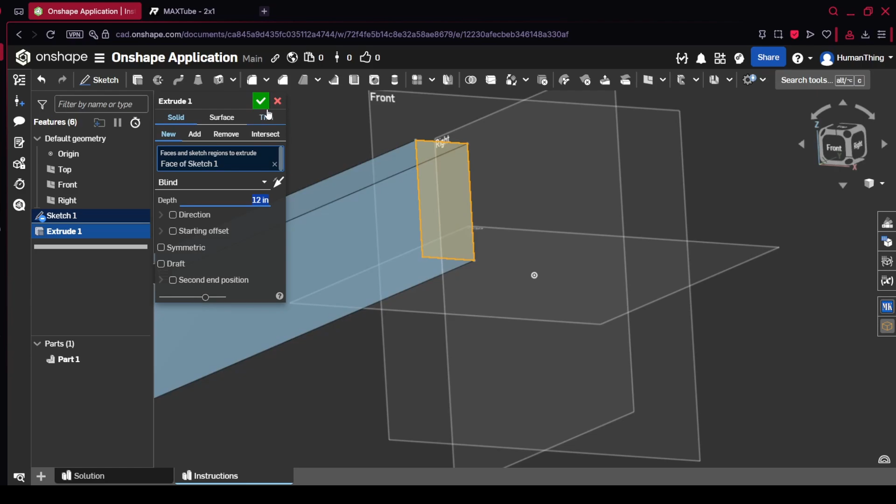So first thing you need to do is you need to of course make a sketch, and the size of a MAXTube is 1 by 2. So you need a 1 by 2 inch rectangle to start. Then you need to extrude that out 12 inches. So you should start with something like this, real simple.

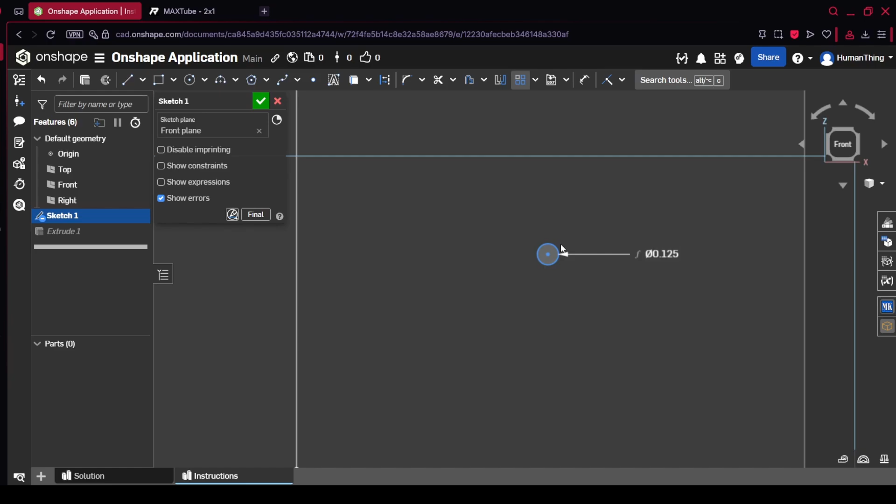Then we're going to go back into our original sketch. This is just for me showing you. You won't actually do this, but you're going to make a circle that is 1/8 of an inch in size. Simple as this. That's going to be the holes that you saw on the MAXTube. And then you're going to use a linear pattern to replicate this. You need to make sure that the holes are spaced 1/2 inch apart. And then you need to replicate it however many times is required for that side.

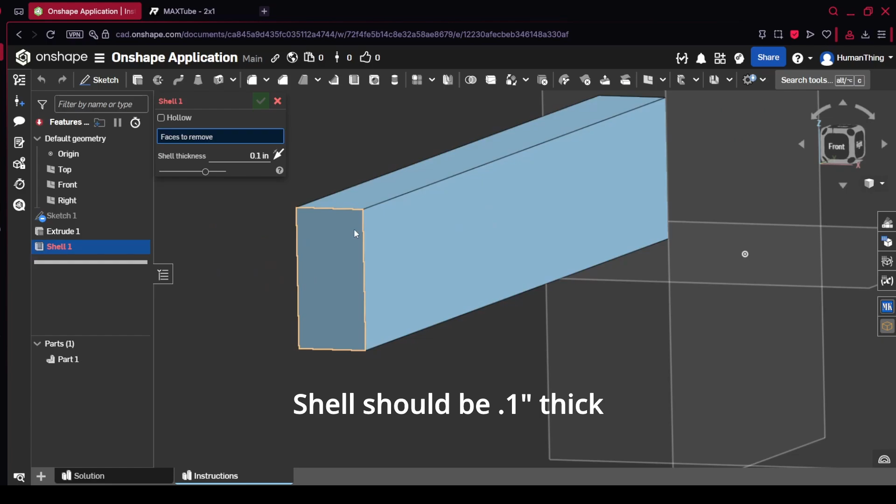And then of course once you finish, you just need to click the check to confirm that's what you want to do, put the holes in it. And then also, the last thing you gotta do is you gotta shell this out. And so shelling it, you're just gonna use the shell tool and shell out this side and the opposite side. So that's your instructions. That's what you're gonna be doing. And so now I'm going to give you some time to try that before I show you the solution. I'll give you about 30 seconds.

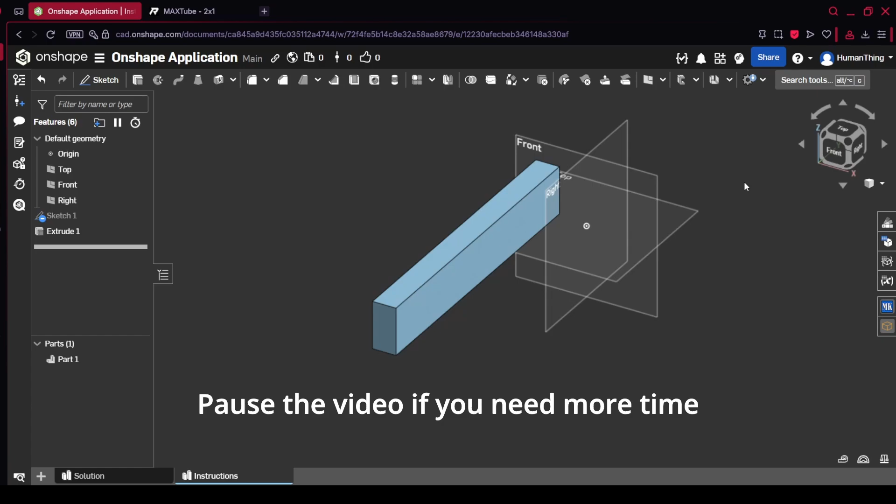Okay, it's been about 30 seconds. If you're not finished, pause the video, come back when you're done. But so now what I'm going to do is I'm going to go over to my solution and I'm going to show you guys how to make this. So of course you first make your sketch, make your 1 by 2 rectangle, real simple. We're going to hit the check there, we're going to extrude this out 12 inches.

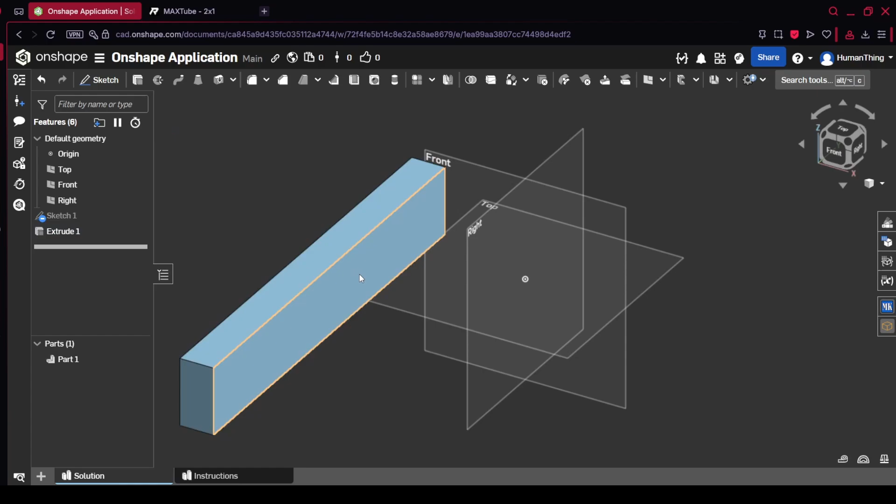And now what we're going to do is we're going to make a new sketch on this face. And very simply, we're going to make our 1/8 inch circle. We're going to use dimension on the center point of it to get it to be a 1/2 inch from this side and a 1/2 inch from this side because that's how far away it needs to be. And then we're going to use linear pattern on this. We're going to tell it to replicate 3 times this way, spaced 1/2 inch apart.

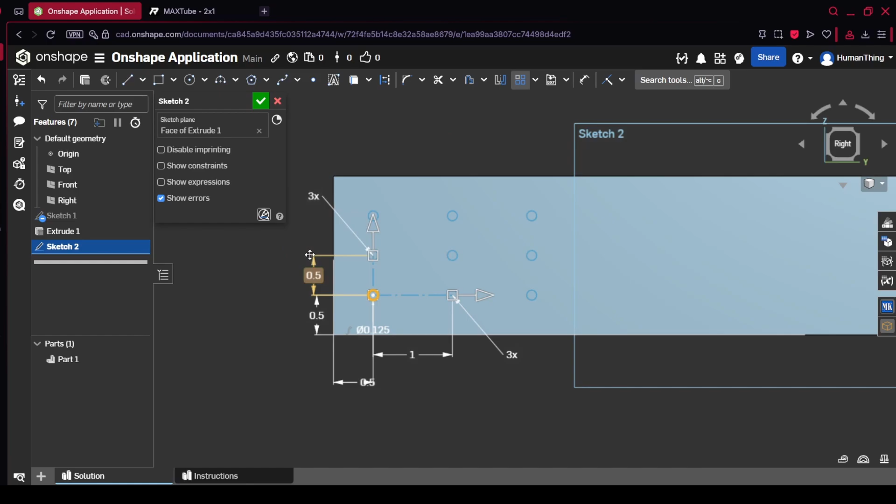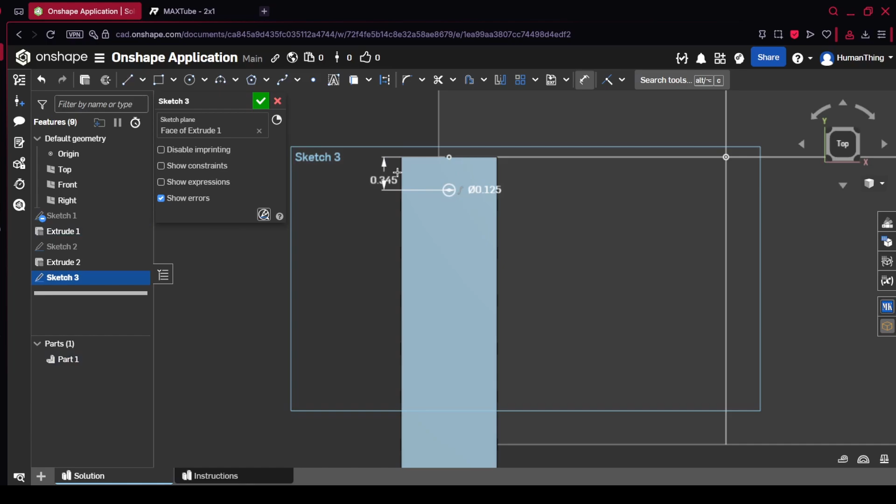We're going to tell it this way, it's going to be 1/2 inch apart, and it's going to do it 23 times. And so if we confirm that, hit check, click on this, extrude, and we're going to tell it to remove at a depth of 1. That is now that part finished. We now do the same thing up here on the top, at which point I'm going to line up with the center here. Do this, set that to be 1/8, and then I'm going to tell it to be a 1/2 inch from there. And then, oh, fun loading.

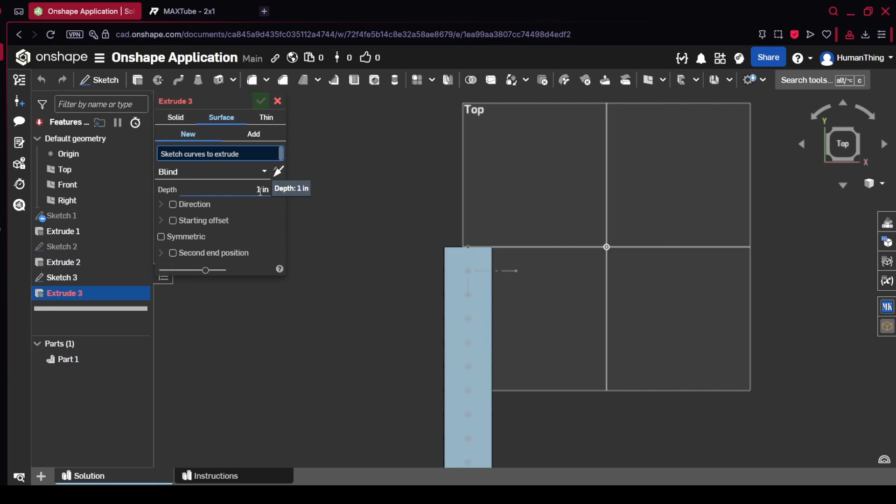I'm going to use linear pattern on this. I only want it going 1 time this way, so I'm just going to set it to be 1 this way. I want 23, but I want it to be going -0.5 in this direction. Hit check, confirm, click the sketch, hit extrude, change this to be 2. Oop, I forgot to click on the sketch. Whoopsie. And so we click the sketch, we hit remove,

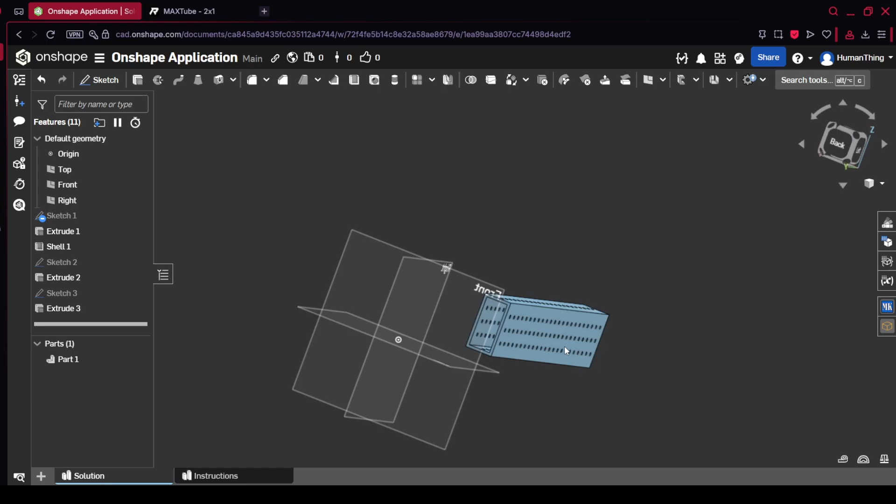2 inches. And now we click on shell, click this side, and then we have to move it up here because Onshape cares about the order that things are in. And boom. Now we have our MAXTube. Fun challenge, right? If you continue watching this series, there will be more later on to test your applications.